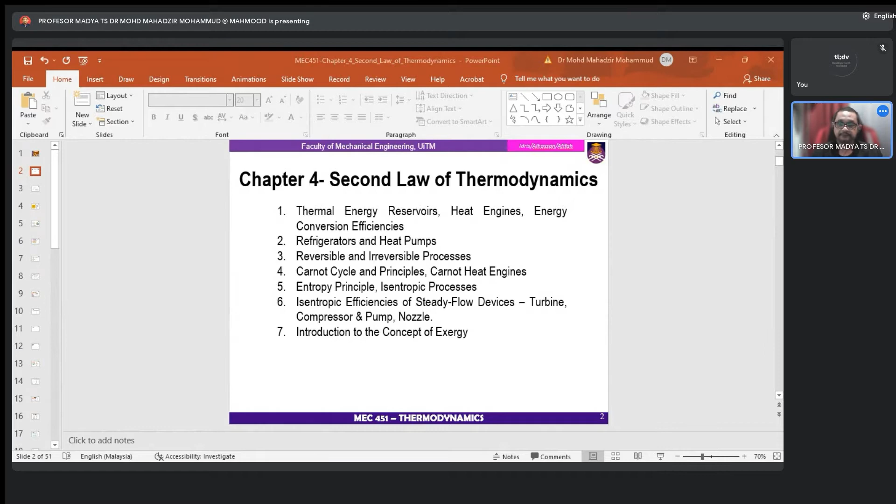You should also be able to discuss the Carnot cycle, examine the Carnot principles, and the idealized Carnot heat engines, refrigerators, and heat pumps. At the end of this part 1, students must be able to determine expressions for the thermal efficiencies and coefficients of performance for reversible heat engines, heat pumps, and refrigerators.

We look at the definitions of the second law of thermodynamics. Actually, what is the second law of thermodynamics? Previously, at the start of the semester, you were introduced to the first law of thermodynamics, which provides the basic definitions of internal energy associated with all thermodynamic systems, and states the rule of conservation of energy. But the second law is actually concerned with the direction of natural processes. It asserts that a natural process runs only in one sense, not reversibly.

For example, take heat. Heat always flows spontaneously from hotter to colder bodies, and we know it can never be reversed unless external work is performed on the system. So its modern definition is in terms of entropy. The modern definition is in terms of entropy.

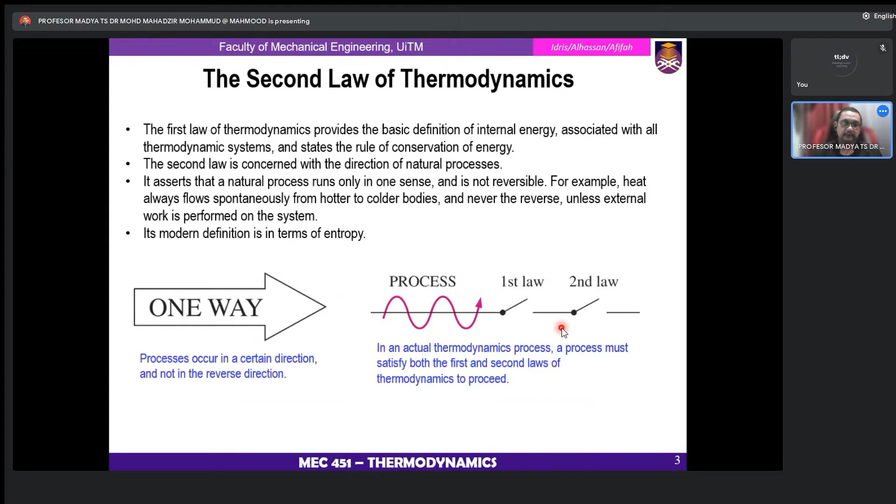The major uses of the second law has three reasons, why we have to study the second law. The first one is this law, the second law, may be used to identify the direction of processes.

Number two, the second law also asserts that energy has quality as well as quantity. As you know, the first law is concerned with the quantity of energy and the transformation of energy from one form to another, with no regard to its quality. But the second law provides the necessary means to determine the quality as well as the degree of degradation of energy during the process.

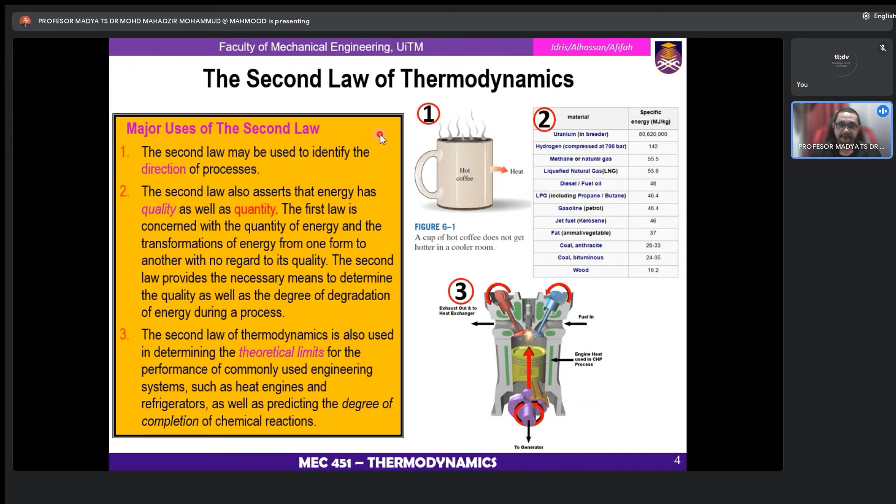Number three, why we must know the second law, is that it is also used for determining the theoretical limits for the performance of commonly used engineering systems, such as heat engines, refrigerators, as well as predicting the degree of completion of chemical reactions. This is the major use of the second law. So these, number one, two, and number three, show the figures that reflect the uses of knowing the second law of thermodynamics.

The development of the second law of thermodynamics is very convenient to have the hypothetical of a thermal energy reservoir, or just a reservoir. So what actually is a thermal energy reservoir? It is a body with a relatively large thermal energy capacity, mass, and specific heat that can supply or absorb a finite amount of heat without undergoing any change in temperature.

There are two types of thermal energy reservoir: source and sink. Source supplies a finite amount of heat without undergoing any change in temperature, and sink absorbs a finite amount of heat without undergoing any change in temperature.

In practice, for large bodies such as the sun, oceans, lakes, rivers, as well as atmospheric air, we can model this accurately as a thermal energy reservoir because of their large thermal energy storage capability, or thermal masses.

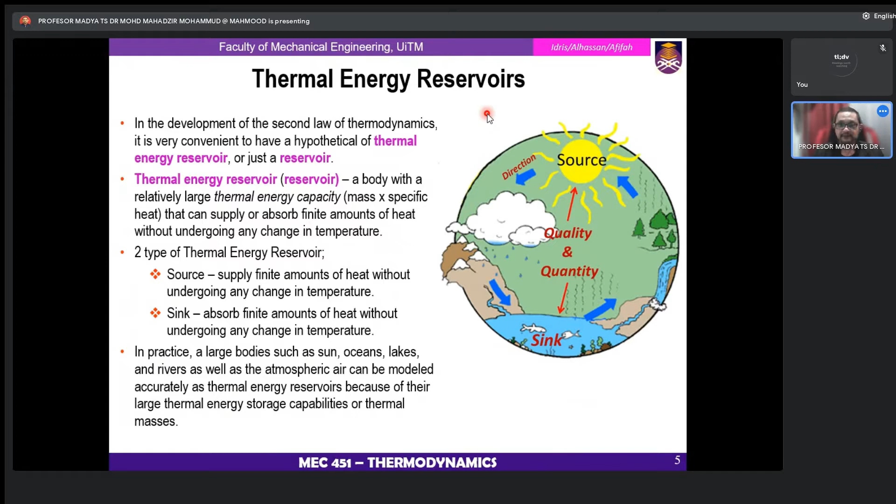Okay, we go for heat engines. The thermal energy reservoir can be simply modeled as a heat engine. So we have defined the reservoir, source, and sink. When we want to understand this reservoir more, we can simplify and model it as a heat engine. The figure of the heat engine is shown on the right side.

Heat engines employ a range of methods to apply heat and convert pressure and volume changes into mechanical motion. That means it converts heat to work. That is a heat engine. Heat engines involve four processes to convert heat to work.

It has a high temperature source, which goes to the low temperature sink through the heat engine. The high temperature will turn the rotating shaft, and this shaft will provide work to the environment. Then the heat engine will reject the heat that came from the high temperature source to the low temperature sink.

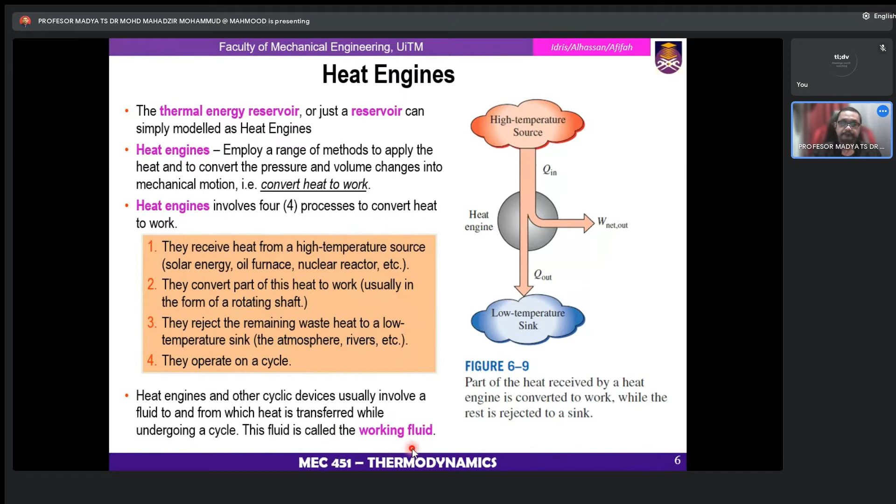Examples of everyday heat engines involve the steam engine. The steam engine is an external combustion engine, and this is what most of the world's power plants use as a steam turbine, a modern form of the steam engine. For internal combustion engines, these are called gasoline, petrol engines, or diesel engines found in automobiles or trucks. But the steam engine is a type of external combustion engine.

The work-producing device that best fits the definition of a heat engine is the steam power plant. These are the pictures or figures of the devices involved with heat engines or steam engines. It has a turbine, a condenser, a pump, and also a boiler.

The boiler provides the energy source, and then it goes to the turbine and turns the turbine to produce work. Then the waste heat coming out from the turbine goes to the condenser, and from there the heat is rejected from the condenser to the atmosphere. From there, the pump will suck the working fluid, such as water, and push this water or working fluid back to the boiler.

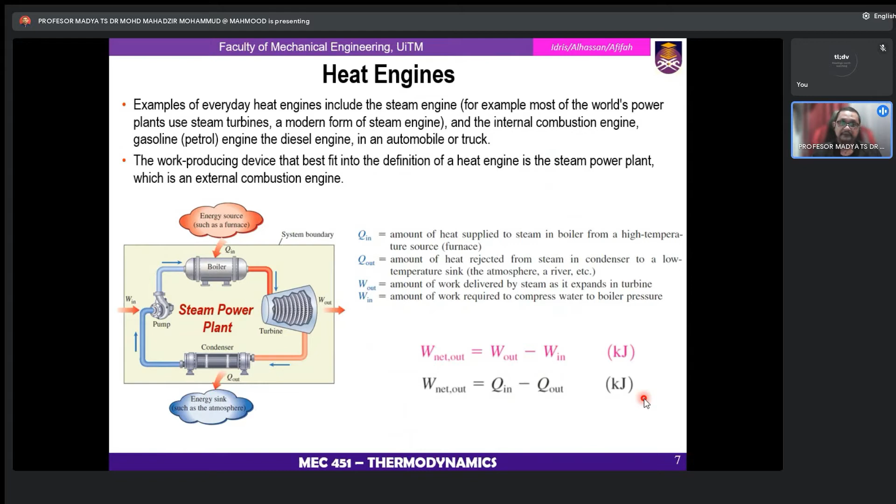Okay, to know the output of heat engines, we come to the thermal efficiency. Based on the cycle of the steam power plant and the third major use of the second law of thermodynamics, the magnitude of energy used in order to complete the cycle of the performance of the plant can be measured. So these are some of the important elements in thermodynamics. You want to calculate the measurement called thermal efficiency, and we can express this thermal efficiency in mathematical form by using the formula of desired result divided by required input.

So for the desired result, you look at these figures. The desired result is the net work output, and the required input is the total heat input. And then from there we put work net over Q in, because total heat input is Q in. And how to get work net? Work net comes from Q in minus Q out. So simplified, we can have the thermal efficiency is 1 minus Q out over Q in. Okay, this is the picture.

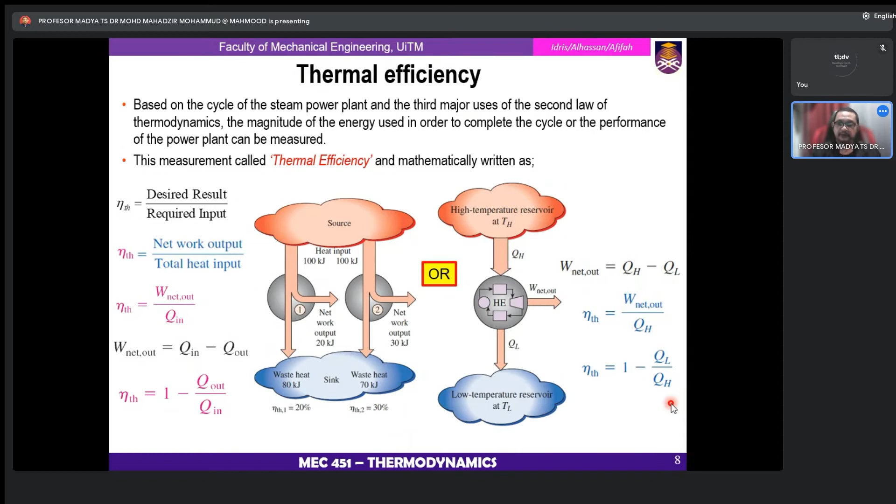Or you can get these calculations also based on the heat engines. Heat engines, as you saw previously, receive heat from a high temperature reservoir source, produce work net, and then all the waste is pushed out to the low temperature reservoir. So work net can be calculated based on Q high minus Q low, heat at high temperature minus heat at low temperature. That's how we get the W net out. And for the thermal efficiency, work net over QH, and simplified, the formula becomes 1 minus QL over QH. That is the mathematical writing for the thermal efficiency.

Okay, now let's look at the second law of thermodynamics, Kelvin-Planck statement. What is the Kelvin-Planck statement? Actually, it is related to heat engines. What does it say? It is impossible for any device that operates on a cycle to receive heat from a single reservoir and produce a net amount of work. That is the Kelvin-Planck statement. What does it mean? It means no heat engine can have a thermal efficiency of 100%.

Or, for a power plant to operate, the working fluid must exchange heat with the environment as well as the furnace. This is the third major use of the second law of thermodynamics, number 3. So the impossibility of having a 100% efficiency heat engine is not due to friction or other dissipative effects. It is a limitation that applies to both idealized and actual heat engines. So that is the Kelvin-Planck statement. You have to understand this statement because it is related to heat engines. Remember, no heat engine can have a thermal efficiency of 100%.

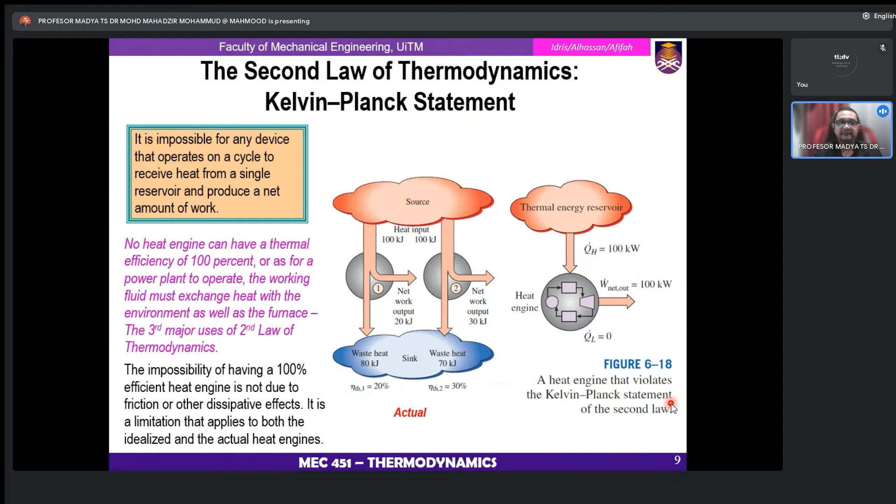Okay, let's do an example of heat engines. It says that a steam power plant produces 50 megawatts of net work while burning fuel to produce 150 megawatts of heat energy at the high temperature. Determine the cycle thermal efficiency and the heat rejected by the cycle to the surroundings. Number one, find the thermal efficiency. Number two, find the heat rejection of the cycle. To solve the problem, you have to remember the thermal efficiency for the steam power plant. A steam power plant is actually a heat engine.

So the thermal efficiency is W, or the work net out, over Q in, or Q at high temperature. So it gives that the steam power plant produces 50 megawatts. Okay, 50 megawatts of net work. So that is the work net.

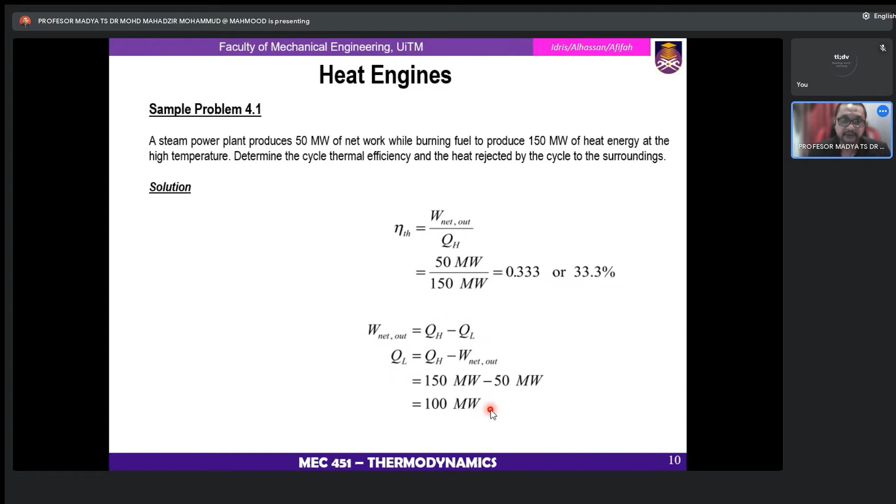Okay, got it? Can I continue? Okay.

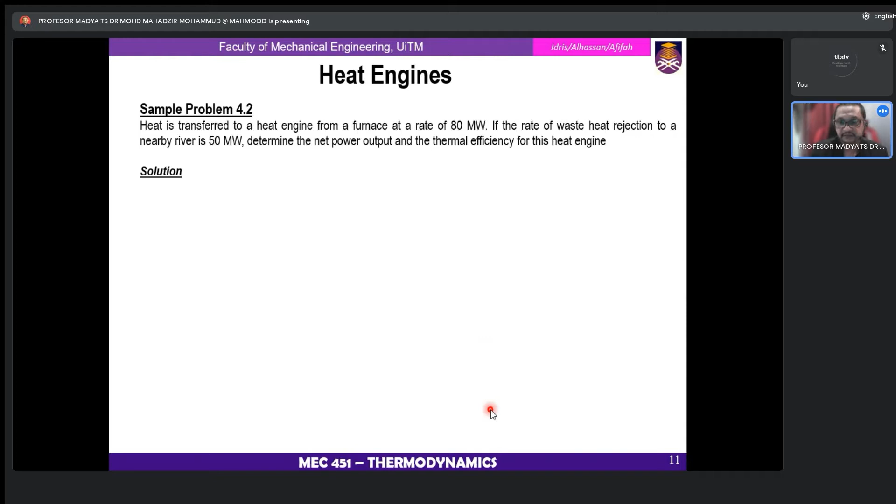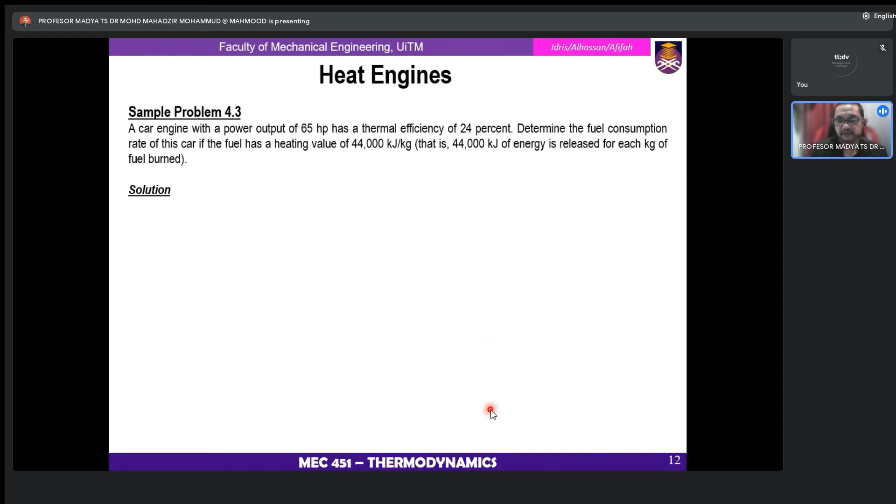Okay, this is another problem. Maybe you can do it as an exercise by yourself. Okay, do the training calculations. And this is an example problem sample. So do it yourself to calculate this, or make the solutions for your practice.

Okay, now we go for the refrigerator and heat pump. What is a refrigerator and heat pump? It is a machine or device that moves heat from one location to another location using mechanical work. That is the refrigerator and heat pump. And it converts work to heat, or heat engine operation in reverse.

Okay, these are diagrams, or pictures of devices that are in the refrigerator or in the heat pump. It also has 4 devices: condenser, compressor, evaporator, and expansion valve. So this system, this refrigerator or heat pump, moves heat from a lower temperature source to a higher temperature sink using mechanical work.

Okay, in nature, you know heat is transferred from the high temperature medium to a low temperature one without requiring any devices. That is for nature. But the refrigerator is to maintain the refrigerated space at low temperature by removing heat from it. So how to do this? We need some devices or some energy that will move this energy from low temperature to high temperature.

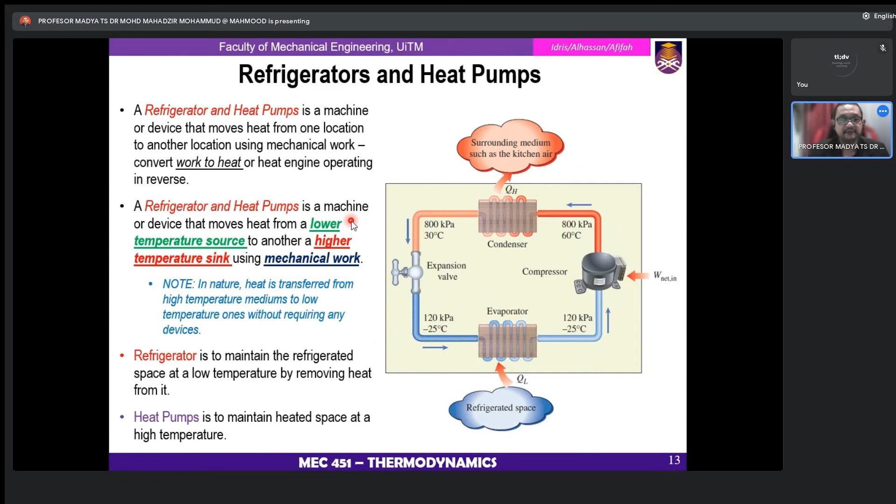For the heat pump, it is to maintain the heated space at high temperature. The concept is the same as the refrigerator, but the function is different. Okay, refrigerator and heat pump. So for this refrigerator and heat pump, the performance measurement that you want to find for this system is called COP. Okay, coefficient of performance.

So to find the efficiency of this refrigerator, let's look on the left side of the figure. So this is a refrigerator; from the cool space, heat has been removed to the warm environment by using a refrigerator that has four devices. Okay, so to do this movement, we need work in to the system. So the COP for the refrigerator is desired output over required input. This is the general equation for efficiency. Desired output over required input.

So look at the refrigerator. What is the desired output? So the desire is to make it more cool. So QL, okay, heat at low temperature. Required input is work net. So you know the work net is QH minus QL, and then put in the formulas, then lastly you will get it simplified. This formula will become 1 over QH over QL minus 1.

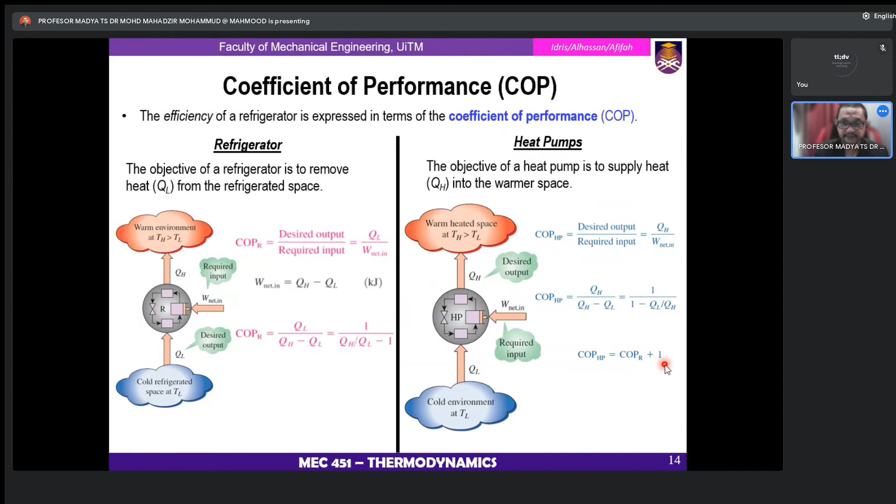Okay, now we look at the Clausius statement. Okay, actually the Clausius statement is related to the refrigerator and heat pump.

Kelvin statement related to heat engines. Okay, what is the Clausius statement? It says that it is impossible to construct a device that operates in a cycle and produces no effect other than the transfer of heat from a lower temperature body to a higher temperature body. That is the statement of Clausius.

So what does it mean? It states that the refrigerator cannot operate unless a compressor is driven by an external power source, such as an electric motor. That's what it means. When you want to operate this system, you have to put in an external power source. This way, the net effect on the surroundings involves the consumption of some energy in the form of work, in addition to the transfer of heat from the cooler body to a warmer one.

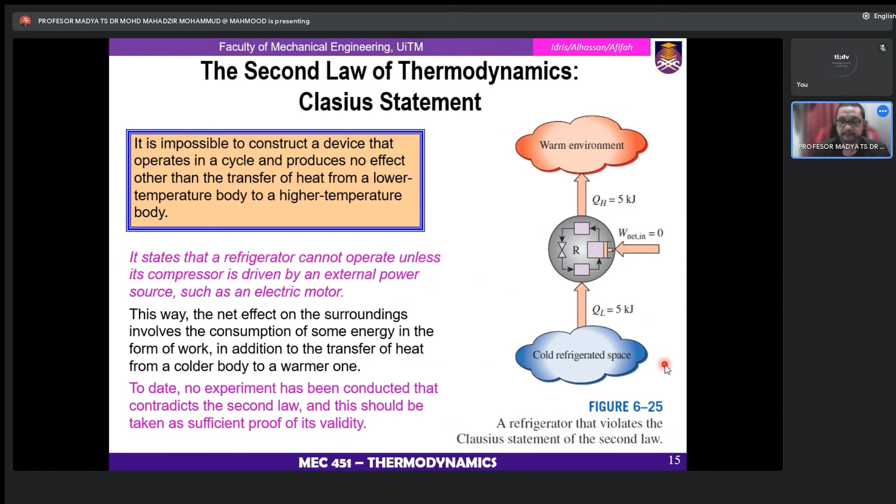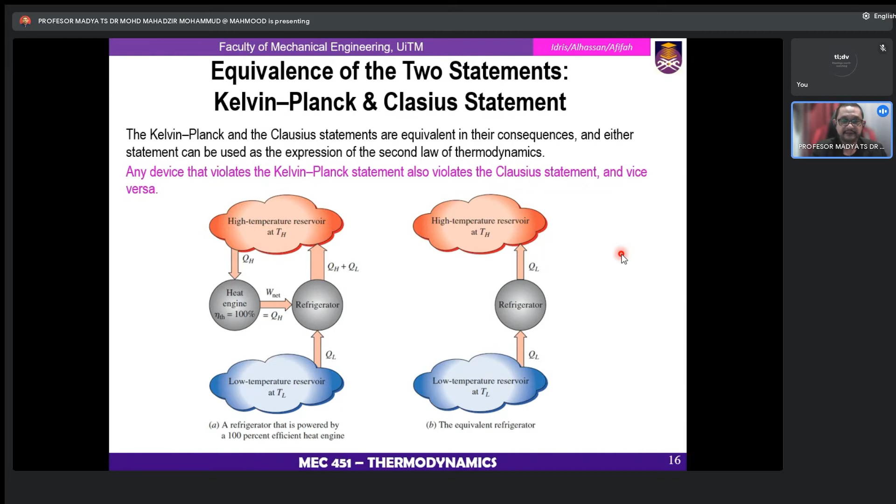Okay, when you look at this refrigerator, this is for the Clausius statement. This is for the Kelvin-Planck statement. So it has the same process. The way of the process is equivalent. That's why we can say both of these two statements are valid for the second law of thermodynamics.

Okay, let's look at the sample problems. The food compartment of a refrigerator is maintained at 4 Celsius by removing heat from it at a rate of 360 kJ per minute. If the required power input to the refrigerator is 2 kilowatts, determine the COP of the refrigerator and the rate of heat rejection to the room that houses the refrigerator.

To solve this problem, the power consumption of the refrigerator is given. The assumption we have to make is steady operating conditions. Then the analysis will first come from the coefficient of performance equation. For a refrigerator, COP is Q dot L over W dot, because if you have a dot at the top, you must have a dot at the bottom. Dot means rate. The unit for the formula is kilojoule per minute.

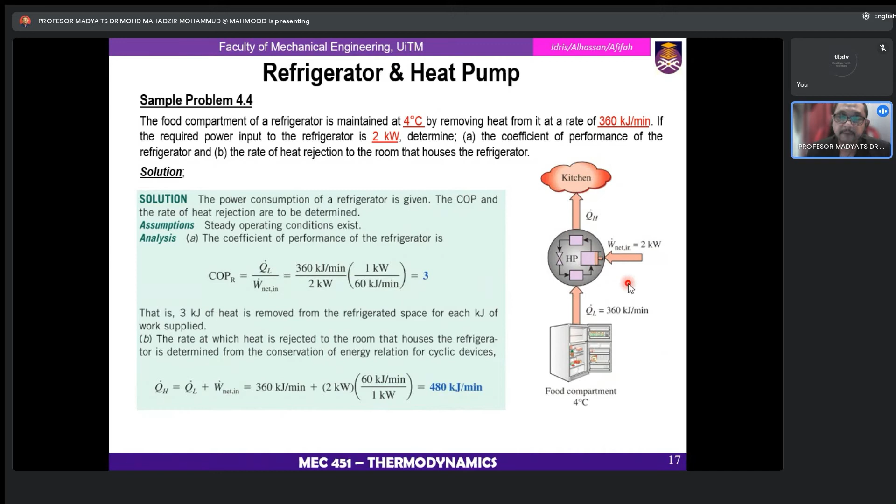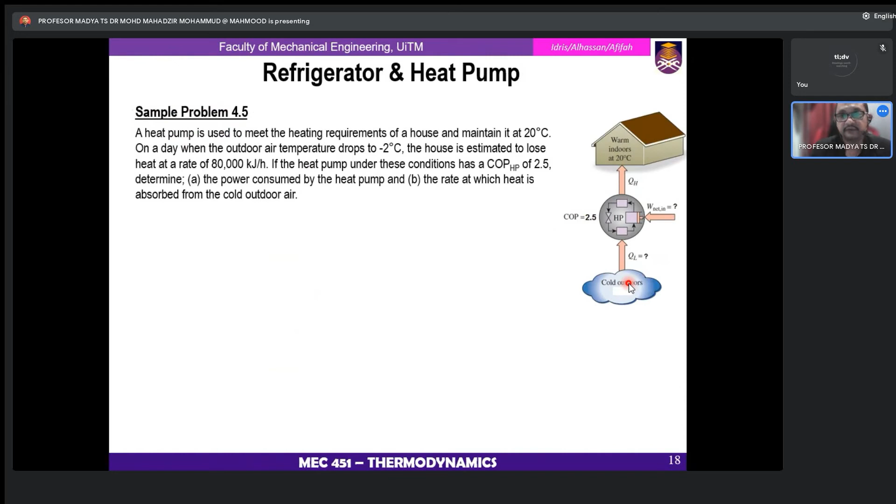Okay, this is how the problem is shown. This is a refrigerator. Q dot L, the low temperature heat, is being pushed to the kitchen using work supplied. Okay, another problem, try to solve it by yourself.

Reversible and irreversible processes. What are reversible and irreversible processes? A reversible process is a process that can be reversed without leaving any trace on the surroundings. And an irreversible process is a process that is not reversible. These are two different things. Actually, in nature, as we learned in chapter 4, all processes are one-way processes. That is, irreversible processes.

But when you want to do analysis as an engineer, you need a reversible process. So an irreversible process we can categorize as an actual process, but a reversible process we can typically consider an ideal process. As you all know, all the processes occurring in nature are irreversible.

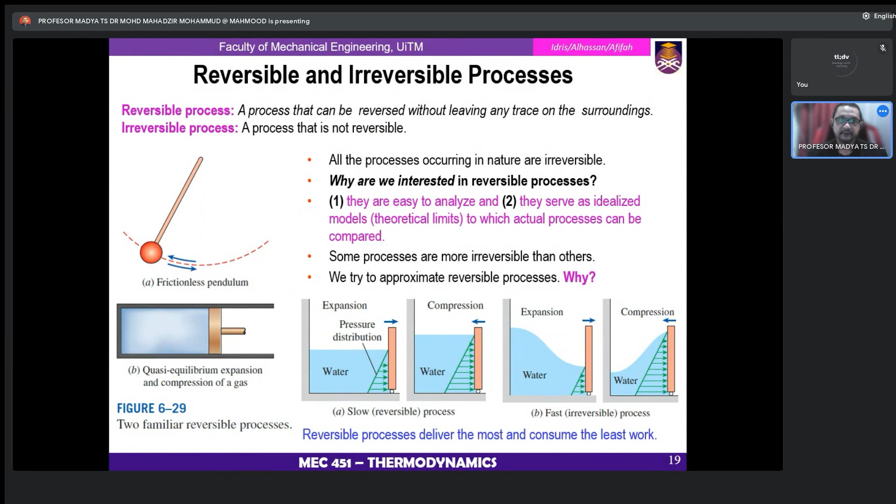Okay, we continue with irreversibilities. What are irreversibilities? This term is for the factors that cause a process to be irreversible. They include friction, unrestrained expansion, mixing of two fluids, heat transfer across a finite temperature difference, electric resistance, inelastic deformation of solids, and chemical reactions. The presence of any of these effects renders a process irreversible. So these are the factors that cause irreversible processes.

Okay, look at the example for friction. Friction renders a process irreversible. If you look at the system that consists of the cylinder, the piston and the gas, there is friction along the cylinder and across the piston, and this makes the process irreversible.

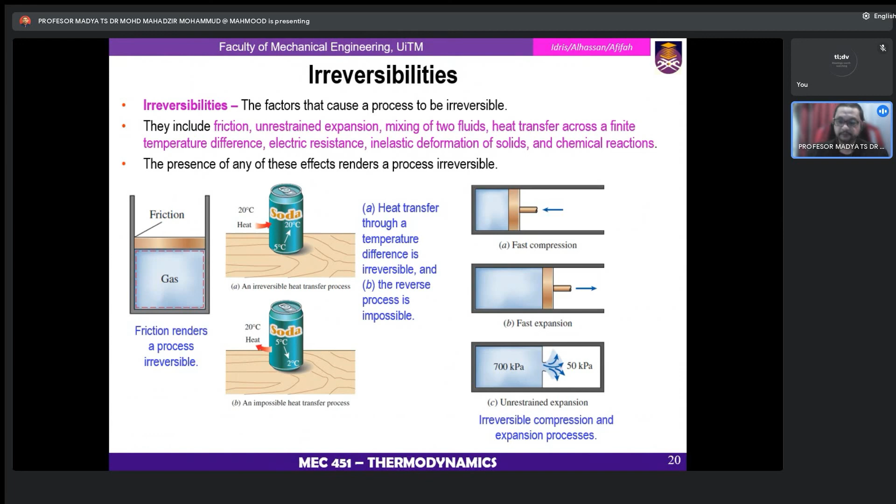Next, let's learn about internally and externally reversible processes. If no irreversibilities occur within the boundaries of the system during the process, we call it an internally reversible process. If no irreversibilities occur outside the system boundaries, we call it externally reversible. When inside and the surroundings have no irreversibilities, not involving any of the factors called irreversibilities, it is a totally reversible process.

So a totally reversible process involves no heat transfer through a finite temperature difference, no non-quasi-equilibrium changes, and no friction or other dissipative effects. This is what you have to know when you make an analysis in thermodynamics based on the second law of thermodynamics. These are some assumptions you have to know when you make an analysis involving a reversible process.